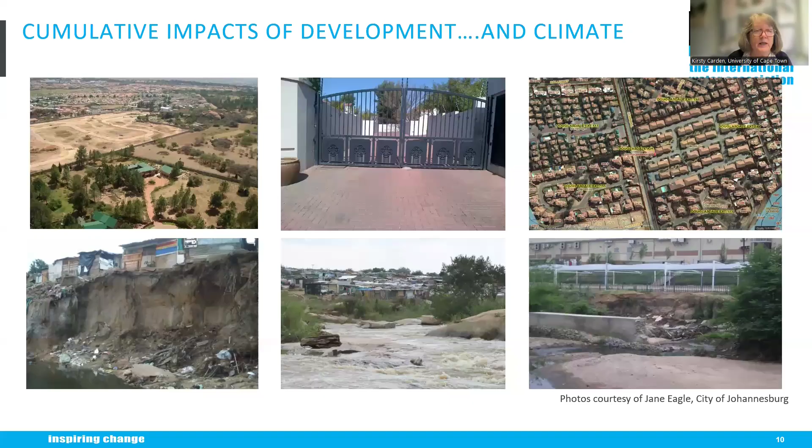I'm going to start off with a little bit of background to why we're doing this, certainly in our context here in South Africa, which is fairly similar to elsewhere in the world, particularly in the global south, where we consider the cumulative impacts of development and climate in what we are seeing in urban areas through the destruction of environments, through flood impacts, through putting in too many impermeable surfaces throughout cities, really encouraging increased runoff and increased pollution conditions.

So in South Africa particularly, we do observe the urban stream syndrome quite significantly because of our informal settlements and the numbers of people that live in informal settlements. So the flashier hydrograph that comes from this increased amount of rainfall falling on impermeable surfaces, of course, results in massive amounts of pollution in the environment.

And this is where what we have seen, the pursuit of the engineered solution to exploit water systems, so the piping of water into settlements without proper drainage and sanitation, comes at the expense of longer-term water security because of the impact of vast quantities of untreated wastewater that enter the environment.

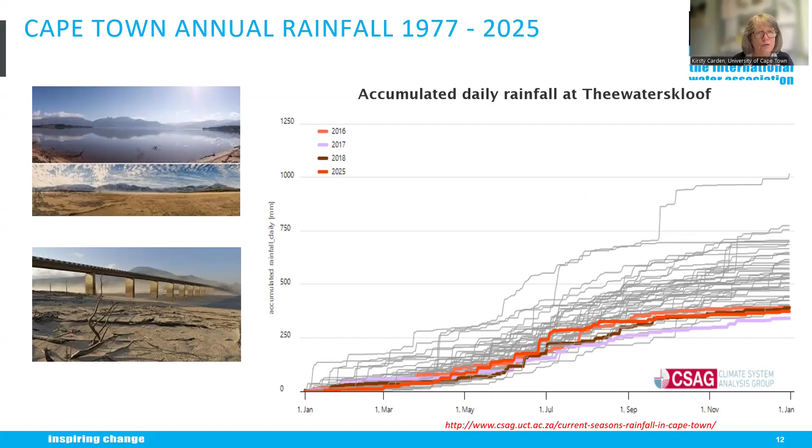So Cape Town's situation in particular, you've probably all heard of Day Zero. It was the time when we very nearly approached a point when taps would have had to be turned off. The accumulated daily rainfall at one of the main dams in our water supply system in Cape Town during 2016 to 2018 became extremely low. The dam reached levels of about 11.5%, making it very difficult to withdraw water. And so Day Zero was a possibility.

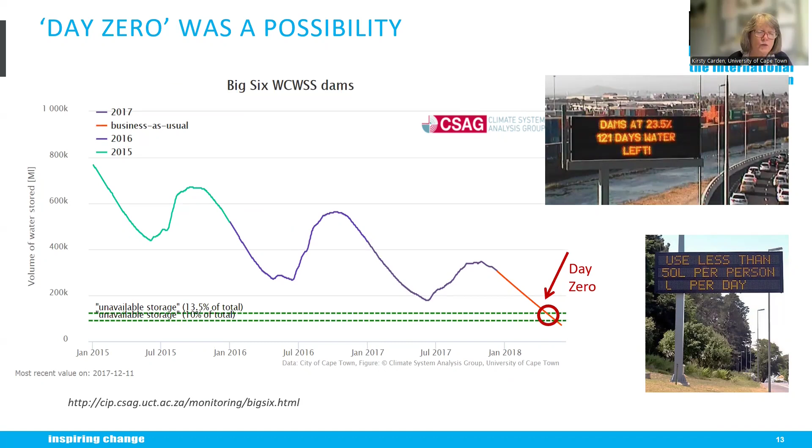The city was having to consider how to deal with this, how to create and provide water for its almost 5 million residents. They had to come up with plans, which largely included demand reduction and thinking about different ways to manage water in our city space. So what it did do, of course, was make us think about how we could future-proof a city like Cape Town, or other urban areas in the Western Cape.

And we took a lot of similar concepts from the Cooperative Research Center for Water Sensitive Cities ideas around water sensitive urban design, and we tried to put that into a framing and context for the South African situation.

Of course, what it largely meant was utilizing that concept of water sensitive design, but into what was really needed as multifunctional infrastructure—this hybrid between centralized and decentralized that could not only meet basic needs, very important in a country like South Africa, but also enhance aspirational needs through blue-green infrastructure, through building human capabilities and well-being, considering things like livelihood creation and managing diverse water resources.

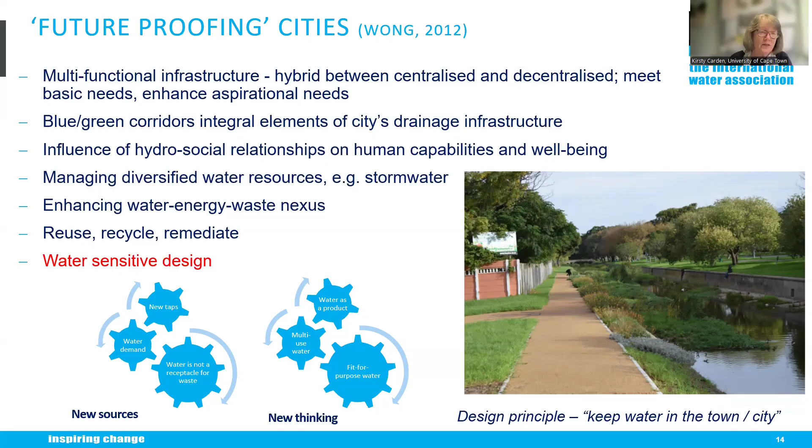So not only depending on a surface water system that we had for the city of Cape Town, but thinking about making use of, for example, stormwater and treated wastewater and other sources of water that we could build into our resource mix.

So as a brief definition, and I'm quite sure most of you know this, water sensitive design is seen as the process, and it encompasses all aspects of integrated urban water cycle management. So this idea that we need to think about water supplies, sewerage, stormwater management, even things like solid waste management, in one holistic view, so that we can actually build it into urban design and planning of cities and towns at all scales. So it's not necessarily a set of solutions and measures, but rather a process and philosophy to optimize both water management and urban design objectives.

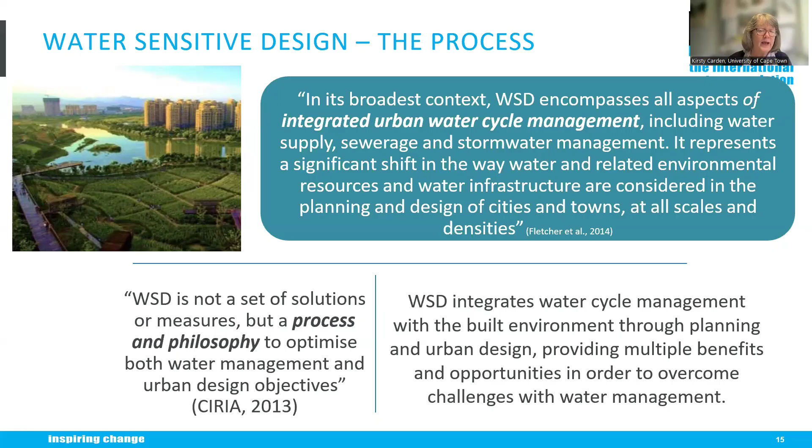It provides multiple benefits and opportunities, particularly in respect of building resilience. If water sensitive design is the process, water sensitive cities would be your destination. These are cities that are sustainable, resilient, productive, and livable through this combination of physical infrastructure, governance arrangements, and social engagement. They're generally green, blue-green cities with nature-based solutions for water treatment, green buildings and roofs, waterway naturalization, flood resilience, and groundwater management through managed aquifer recharge. So there is this intentional water sensitivity built into the design of a city.

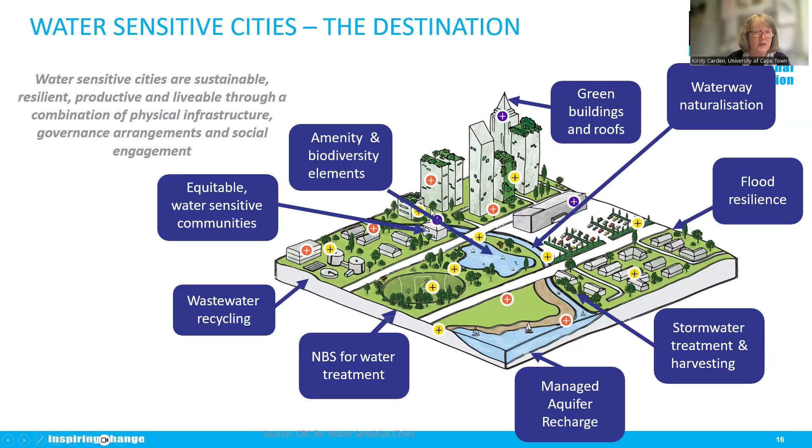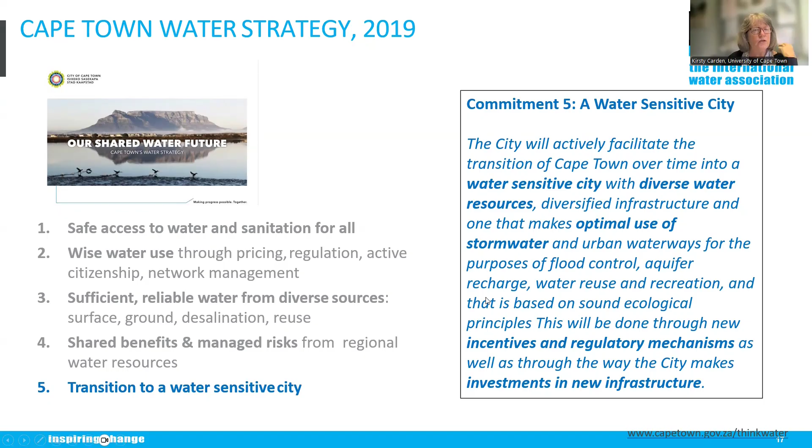What happened post the drought in Cape Town is that they developed a new water strategy in 2019, where they put together five commitments. The first are around the provision of basic services in a city with a large number of people living in informal settlements. But the fifth commitment is the transition to a water-sensitive city by 2040. The city has committed to facilitating that transition over time, to build in diverse water resources, make optimal use of stormwater, and consider the urban waterways for flood control, aquifer recharge, water reuse, and recreation. They're doing this through an implementation plan that includes incentives, regulatory mechanisms, and investments in new infrastructure. But in order to do this, there needs to be an enabling environment.

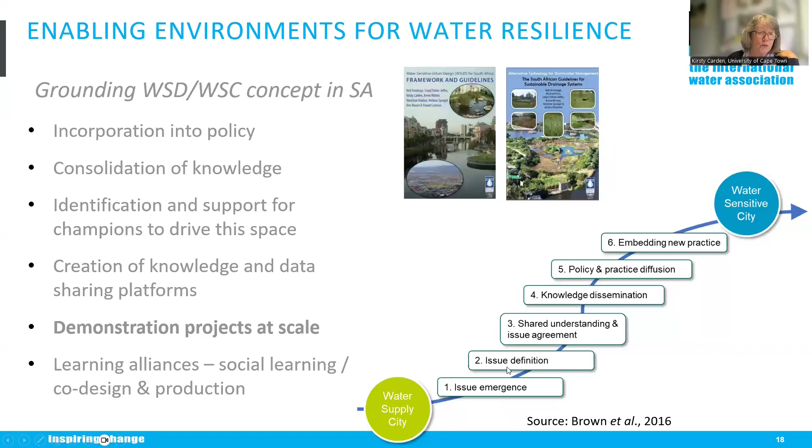So how do we ground this water-sensitive design or water-sensitive city concept in a country like South Africa? We have to start by incorporating it into policy, consolidating the knowledge we have, and creating knowledge and data sharing platforms that help us identify and support champions, and build learning alliances so we have co-design and social learning around this relatively new paradigm. But we also need demonstration projects at scale, to show particularly to politicians and decision makers why they should be investing in blue-green infrastructure, nature-based solutions, or water-sensitive design, which all essentially mean the same thing.

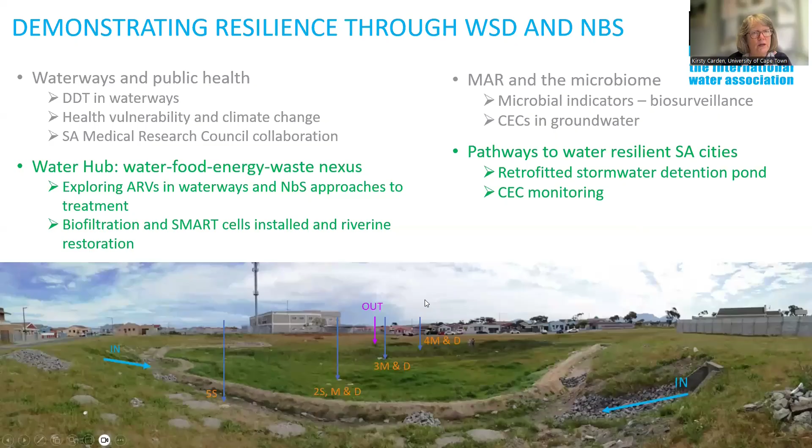To demonstrate that, I'm going to share a couple of examples from our Future Water Research Institute at the University of Cape Town, where we have what we call living laboratories. These are spaces where we can do more than lab scale research, looking at how things work in the real world. Some of these we've looked at are around waterways and public health. We also have research projects focused on managed aquifer recharge and groundwater management, particularly contaminants of emerging concern. And then we have two other projects: one at a demonstration site called the Water Hub, and the other a stormwater site in Mitchell's Plain, a suburb within Cape Town, where I'll explain what we've done through the living labs.

So the PAWS project stands for Pathways to Water Resilient South African Cities. We've all got clever acronyms for our research projects. This project was born out of the Cape Town Day Zero crisis, where we wanted to consider whether we could use the existing stormwater infrastructure, of which there's a significant amount in Cape Town. We have upwards of 850 stormwater detention ponds as part of our flood alleviation infrastructure. We wanted to know whether we could retrofit stormwater ponds to link stormwater runoff to water supply, and also enhance the environment around the pond with water-sensitive design elements and landscape-based solutions, building the multifunctional benefits that come from water-sensitive design and nature-based solutions.

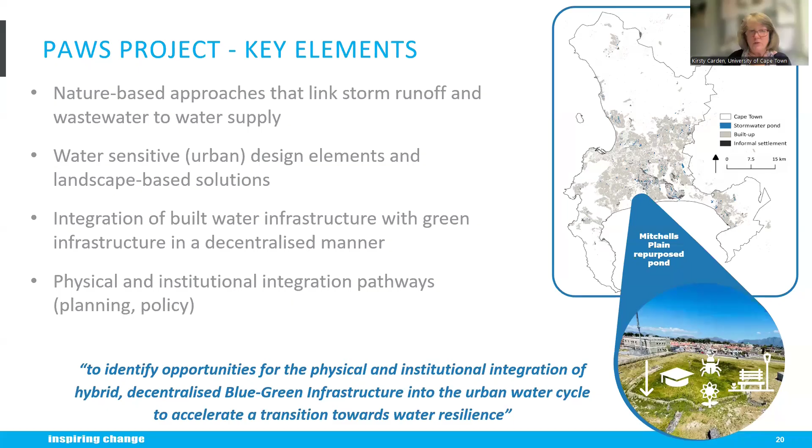So what we did with this - we selected a stormwater pond in Mitchell's Plain. There you can see a school in the background. We specifically selected a pond that had an anchor close to it that we could align our activities with, and we also did quite a lot of education activities together with the school.

This particular stormwater pond has two inlets and one outlet. Before the retrofitting took place, the stormwater largely short-circuited straight through the pond into the stormwater system, so there was very seldom any ponding of water in the system. But even so, this pond was designed to not keep water in it. It is a detention pond, not a retention pond, so it only holds water for a very short period of time, in the midst of a heavy storm.

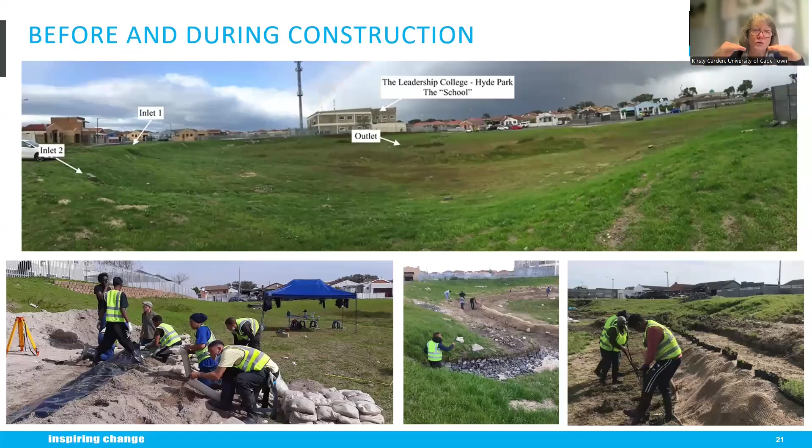So what we decided to do, in collaboration with local residents who did the co-design and co-construction with us, was build an infiltration swale in front of the two inlets to the pond, which acted as a means to hold back water coming into the pond and allow it to infiltrate slowly into the groundwater system. After construction, we also cleared out the inlets and added rock check dams as litter traps in the infiltration swale itself.

You can see here how the water comes into the pond. It's held in this forebay area, so some sediment drops out at that point along with litter capture. It then stays in the infiltration swale with two weirs on either end to allow overflow if it reaches a certain height, and then slowly infiltrates into the groundwater underneath the pond.

What we found after this key first phase is that retrofitting worked quite well, increasing infiltration by about 15% even without abstraction. Future scenarios with groundwater abstraction through managed aquifer recharge and recovery could result in stormwater harvesting and increased infiltration of about 110%.

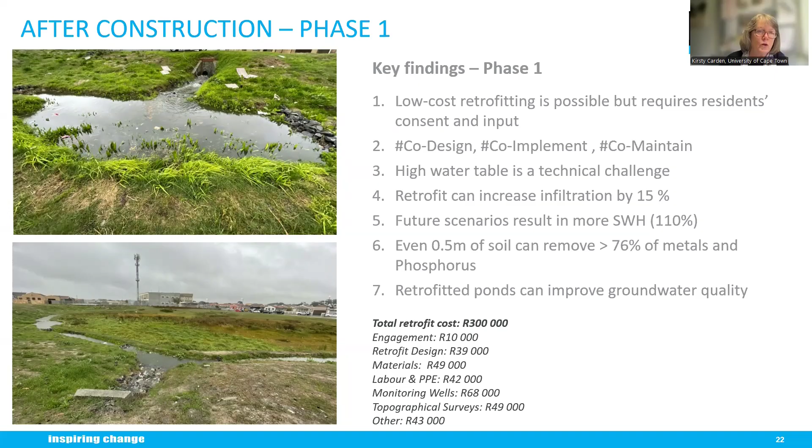Importantly, we also found that the stormwater was being treated. The retrofitted ponds significantly improved groundwater quality because of this. The stormwater coming into the site was relatively polluted, not bad—this was a formal informal settlement, so it wasn't sewage or anything like that—but it certainly did improve groundwater quality having a nature-based solution in place.

But of course it was more than that, in terms of how do we keep stewarding a system like this, and how do we bring people into multifunctional infrastructure space so it becomes an important aspect of a community and actually functions in a way that really brings those multiple benefits.

In an area like Mitchell's Plain, safety, security, and preventing land invasions become important. So beautifying this space, turning it into community infrastructure that can be used, is really important—raising awareness, adding support for amenity and biodiversity benefits, and making sure local residents could get involved.

This meant involving residents in the co-design, management, and ongoing stewardship of this space, and bringing in education programs and potential for job opportunities or job creation through things like seed harvesting, plant nursery development, sandbag building, and all sorts of other things that were part of showing why this is an important space.

Importantly, what also happened out of this particular project is that we built a Water Resilient Cities community of practice, so we could have an ongoing conversation about why this sort of co-production around these case sites, these living laboratories, is so important—with many different civil and city stakeholders of multiple disciplines and professions, providing them a platform to foster network building and social learning necessary for this type of living lab.

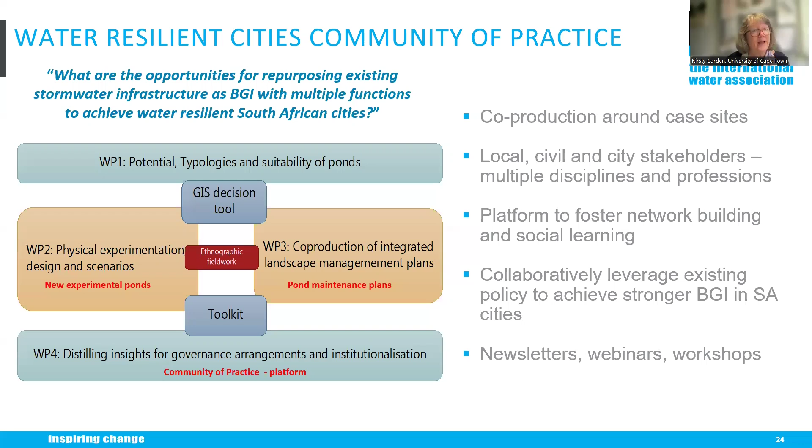And that's ongoing, even though this project came to an end at the end of last year.

Very quickly, I also wanted to share an off-campus urban living lab we have just outside Cape Town, about 60 or 70 kilometers east, outside a little town called Franschhoek, where we were given the opportunity to retrofit a decommissioned small wastewater treatment works that historically served the town but was decommissioned when they built a new wastewater treatment works. It's located downstream of an informal settlement.

You can see in this picture, on the slopes of the mountain, an informal settlement called Langrug. About 8,000 people live there in various types of informal dwellings with very poor service provision, particularly around sanitation. A small river runs past Langrug through this agricultural area and past the water hub, our demonstration site, where we experiment to see if we can use nature-based solutions to treat and clean up highly contaminated runoff from the informal settlement.

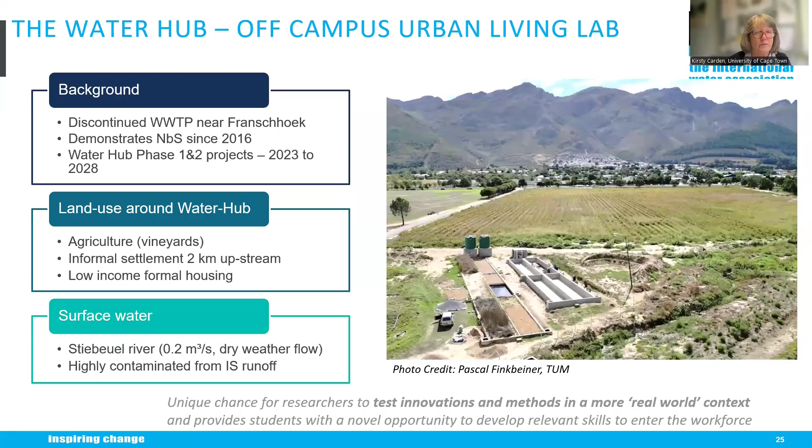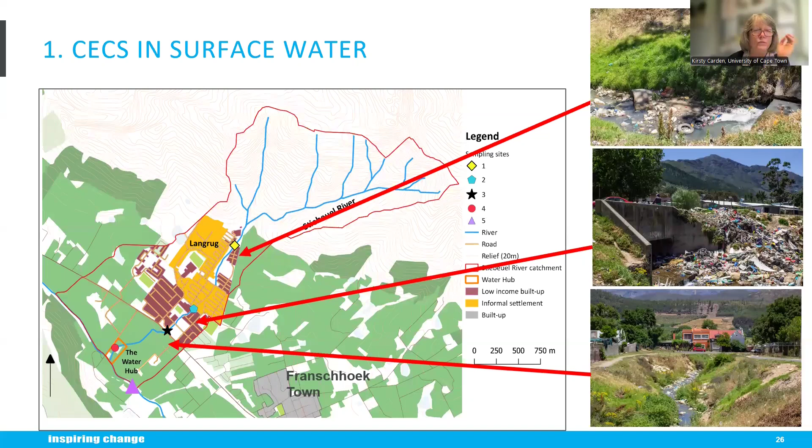This runoff comes into the river and joins the bigger Franschhoek River further downstream. Here you can see a map showing Langrug on the side of the mountain, the small catchment of what we call the Stiebeuel River that flows past Langrug, and the red dot at the bottom is the water hub. Some of the pictures show the state of the river—very, very badly polluted with sewage, solid waste, and generally highly contaminated runoff from the informal settlement, which runs all the way down past the water hub and through to the Franschhoek River.

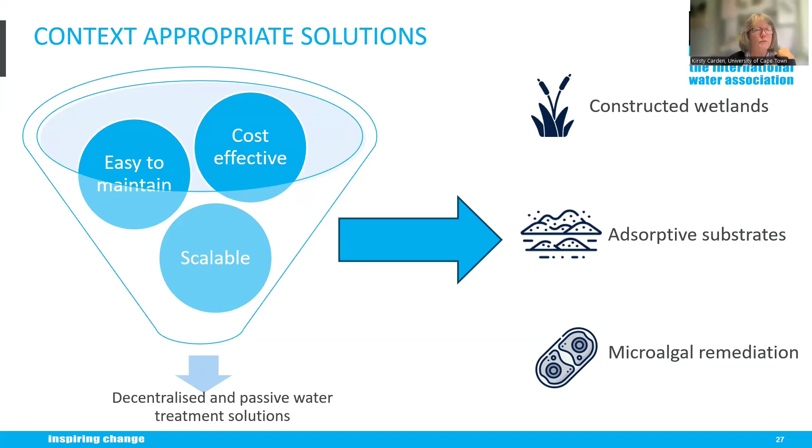So what we were hoping to do is to put in nature-based solutions that were context appropriate for this particular very low income environment: easy to maintain, cost effective and scalable, and could be used as a decentralized, passive, no electricity, no chemicals water treatment solution that we could potentially scale to other informal settlement contexts around the country. We did this through constructed wetlands or biofiltration cells, using adsorptive substrates, microalgal remediation and other forms of nature-based solutions.

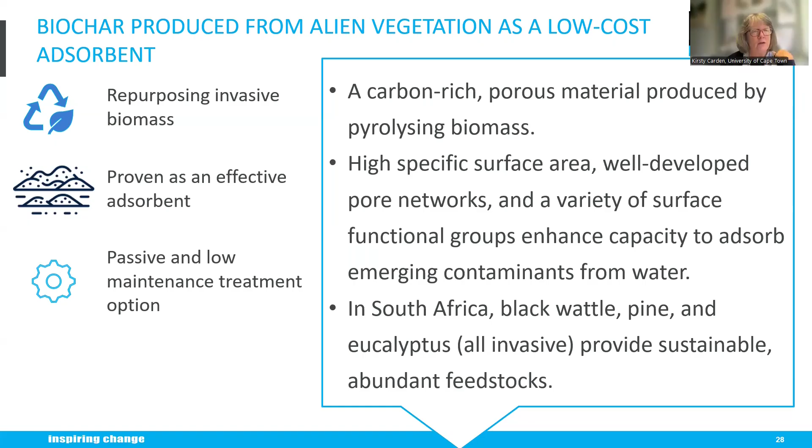In one of the experiments, we use biochar produced from alien vegetation as a low-cost adsorbent. This has multiple benefits in that we're repurposing invasive biomass into something useful. It's been shown to be an effective adsorbent and provides a passive, low-maintenance treatment option. It also gives job opportunities in a poorly economically resourced environment, and removal of alien vegetation contributes to more runoff into our dam system, our surface water storage system in the Western Cape. So there are really multiple benefits from this.

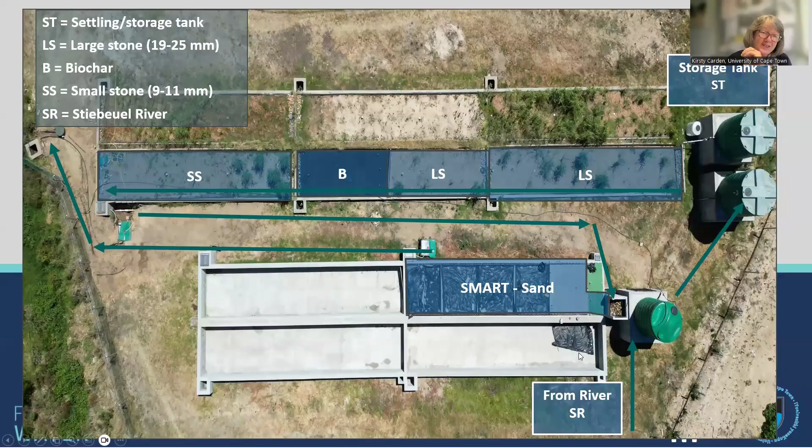The system for this project is 2 sets of adapted sludge drying beds that have been turned into constructed wetlands. They have different types of media, from large stone to biochar to small stone. River water is diverted into a storage tank, runs through this constructed wetland treatment train. Some blocks are planted with plants, not all of them, and there are control blocks as well. That water then gets pumped into a sequential managed aquifer recharge sand filter system, and from there it goes to various project follow-on steps, which I'll share with you now.

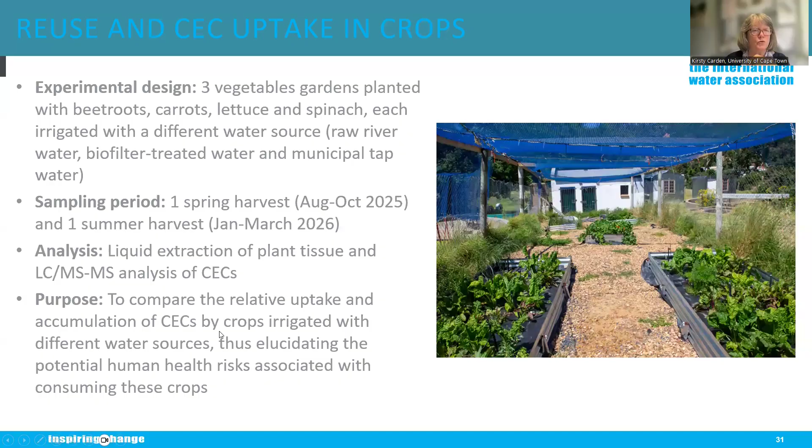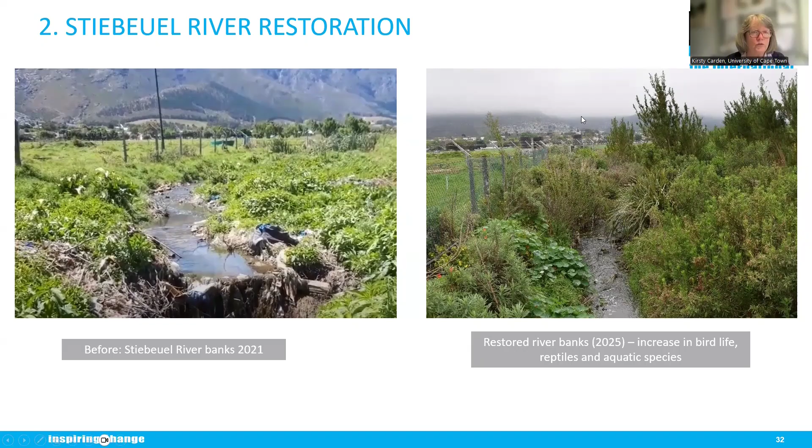Another project at this living lab at the Water Hub is restoration of the river system to put back the biodiversity that is supposed to be there. On the left you can see before, in 2021, the Stiebeuel River was poorly overrun with alien vegetation. It has now been restored with indigenous vegetation, which also contributes to increased water quality through the river system as a whole.

Livelihood opportunities at the Water Hub are being further developed as various projects carry on there. One is around irrigation of vegetables and soil with this treated and untreated water, so we can study the mobility of these emerging contaminants. There are link-ups with local farmers, restaurants, and guest houses to be able to use these vegetables and food products in safe food environments, and also growing cut flowers. If the water is not of significantly good enough quality, there are other sustainable livelihood opportunities that can happen at the Water Hub.

Ongoing projects: we are expanding the water treatment facilities at the Water Hub, and also looking at various employment opportunities in agriculture and biogas generation. A biogas reactor is being installed at the Water Hub, with potential to bring in organic waste from the town and from the Water Hub itself, from restaurants and breweries nearby, so we can start powering various facilities there, showing a circular and linked system around the food, energy, water nexus.

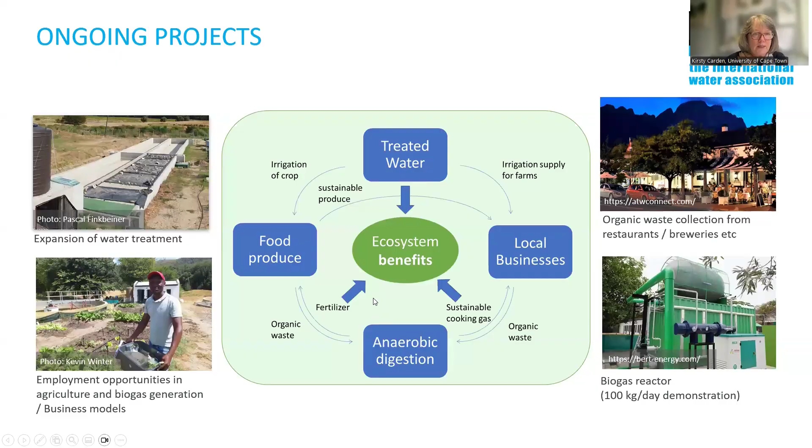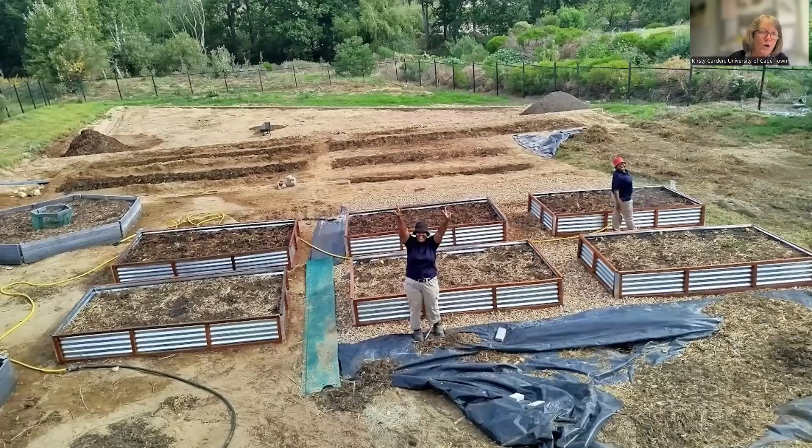This is a recent project where we have expanded the agriculture project. It's a local social enterprise with people from the nearby informal settlement. We're in the process of building raised food growing beds that we will irrigate with this expanded treatment train, and these vegetables will now be supplied in bulk to the town.

Lastly, another social enterprise activity linked to what we're doing at the Water Hub is a series of e-bikes. These delivery bikes will be used both to collect organic waste to bring back into the biodigester, and to deliver vegetables from the social enterprise growing on site. This is my very last slide, where we're also trying to put together, almost complete, what's known as a green precinct at the University of Cape Town.

This is seen as an important initiative to bring students into what we are trying to do at the university as a whole. We have sustainable water supply options that will be showcased here.

There is a decentralized wastewater treatment facility, a membrane bioreactor, that takes sewage from two of the student residences. It gets treated on site, put through a constructed wetland system and a number of sustainable drainage options to improve its quality, then used for toilet flushing and irrigation at another residence next to the site.

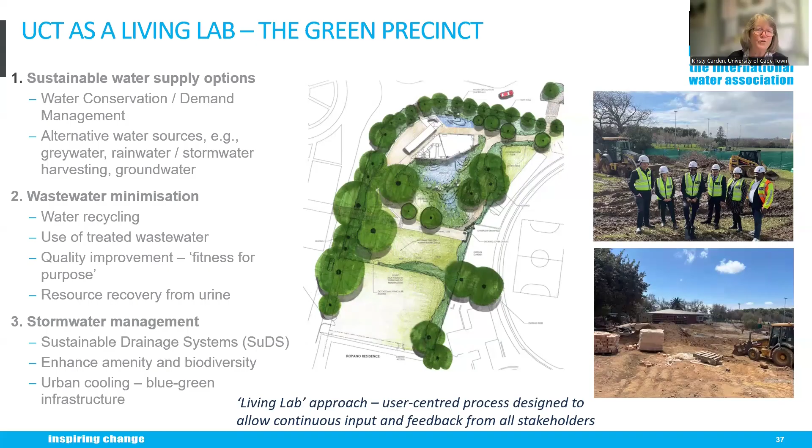Future Water will be hosting and leading this process going forward. And I think that is me.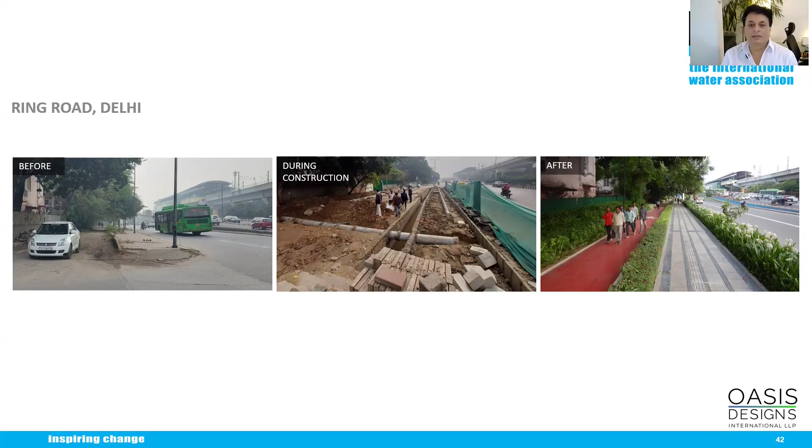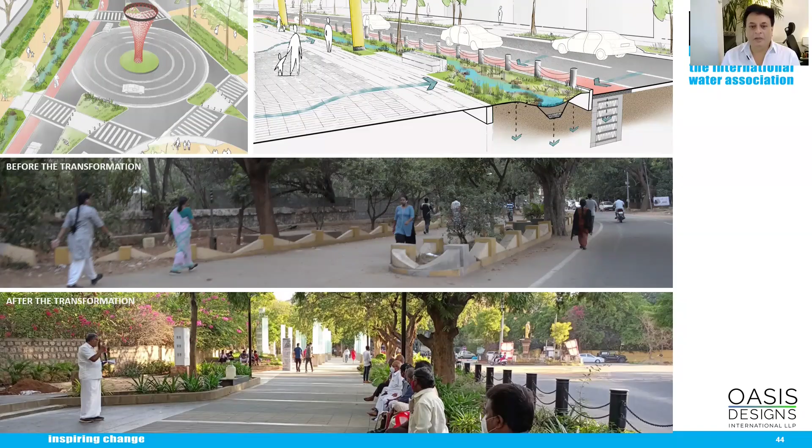But this is what the final product looks like when all the water from the road is actually getting into that swale and is being allowed to percolate into the ground. So while you're fixing a street, you could very easily build in these kind of facilities to ensure that overall sustainability for the city remains, increasing the resilience factor by programming your open space. Similarly, we have done many projects around streets across India.

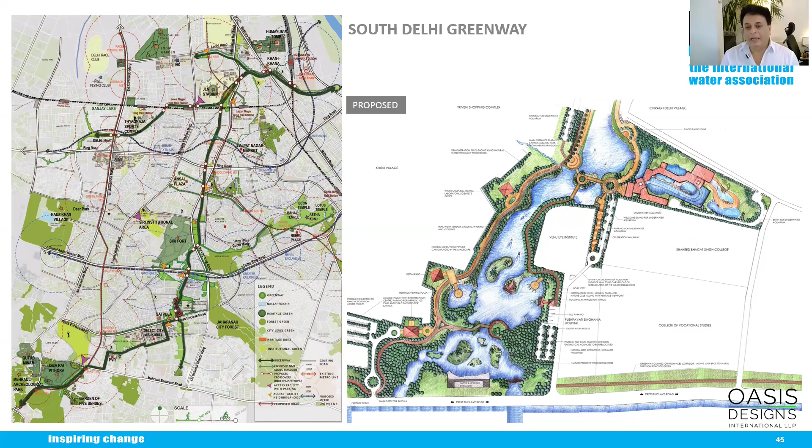One very interesting project that we worked upon, which brought more understanding about water, was this natural drain corridor in Delhi, about 12.5 kilometers, flowing from the ridge to the river, but unfortunately had started collecting a lot of sewage on the way. So we looked at how we could clean up the whole system and reconfigure it as a greenway for cycling and walking and connections to history, becoming a truly public spine for the city.

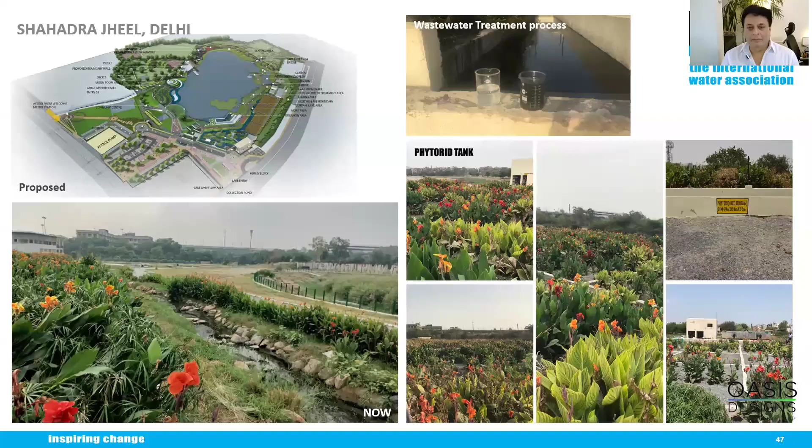So these are some visualizations of what is there and what we were hoping to make those into. We got a chance to really work around wastewater treatment when we had to revive a particular lake in Delhi where there was no source of water. All the catchment areas were built up, and there was only sewage flowing next to the lake, which we thought if we could bring that in, treat it with phytoremediation.

And here we work with the organization called NEERI, and we managed to make all the flower beds that you see actually part of the phytorid treatment. So the water under this flower bed is getting treated, and you can see the result of that and how we filled up the lake with treated wastewater.

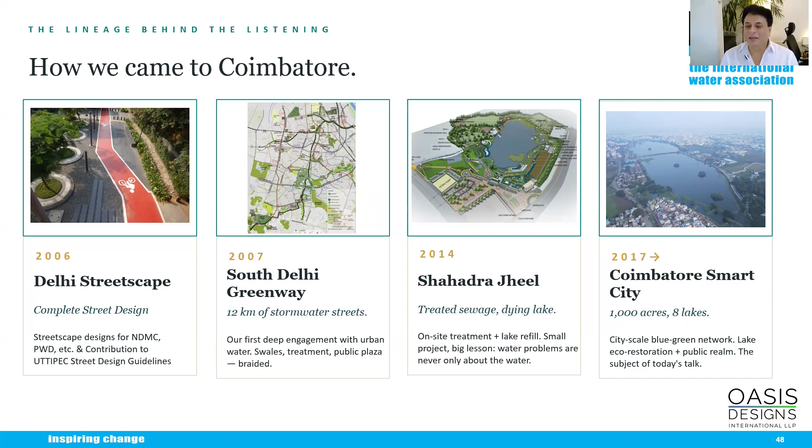So the journey from how we manage stormwater on streets, what a city level system of drainage channel being repurposed, filling up a lake with treated wastewater - it kind of prepared us in a way to look at this project, which I'm going to do a deep dive on now for the Coimbatore Smart City.

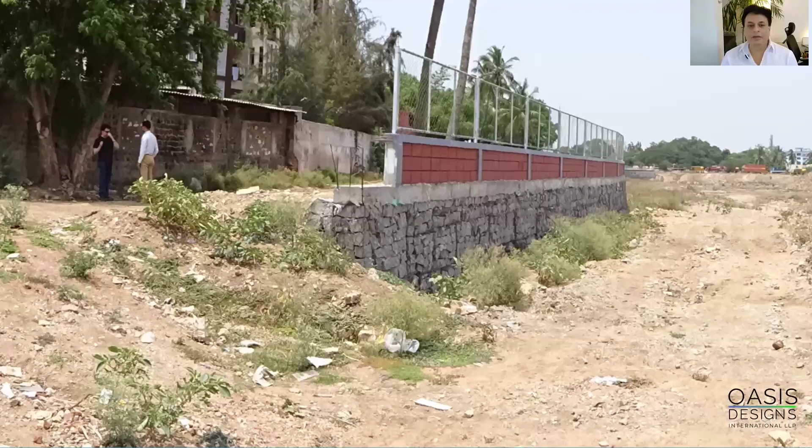Right from the beginning, before we bid for the job, we first made up a consortium of people we could learn from in terms of water. Like I told you, we are architects, designers, and urban designers, landscape architects, but we do not have the detailed understanding of sizing up different components of wastewater treatment, for instance. Similarly, we brought in a hydrology expert to look at the overall situation, catchment areas and all, and we worked with a local architect. So while pitching for the project, we kind of had a very strong team when we went in.

And the local architect, you can see us there. I was on the first site visit. I was asking him, where is the lake? And the whole place looked like that. So he said, we are standing in the lake. So, I mean, for me to imagine that this whole piece of land was actually a lake, it took some level of imagination.

Then looking at the city, we realized that the whole city has come up around the river Noyal Valley. And you have the hills in a horseshoe pattern where all the water that comes down from the hills to the river was being actually held back. This was a historic system designed by the Chola dynasty, maybe 1,000 years back, where all the water that comes in from the hillside was collected. Each stream that you can see was collected in a lake. And then you also had anicuts on the river, which would become an extra source of water to a particular lake.

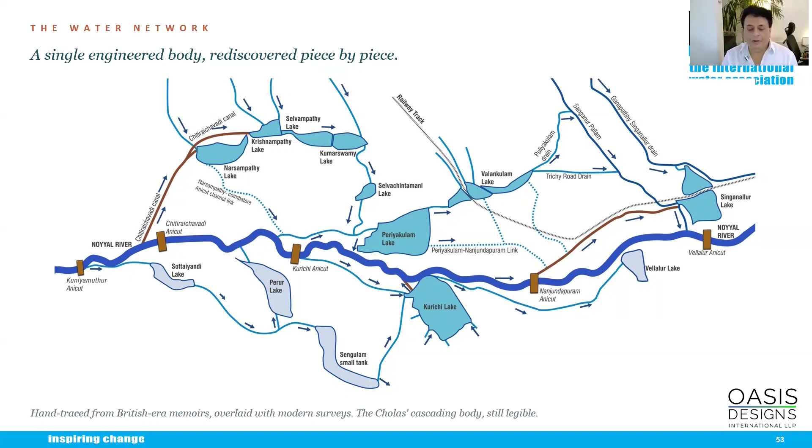So one is it's getting fed directly from the streams coming down from the hills. And the other one is that we have a connection from the river. And the third one is that it overflows into the next lake. So every lake downstream is being fed by the lake upstream. Once it fills up, all of that water finally finds its way back into the river. So instead of just allowing the water to flow away, these people had designed a system to hold on to the water historically for irrigation and for agriculture and those kind of uses.

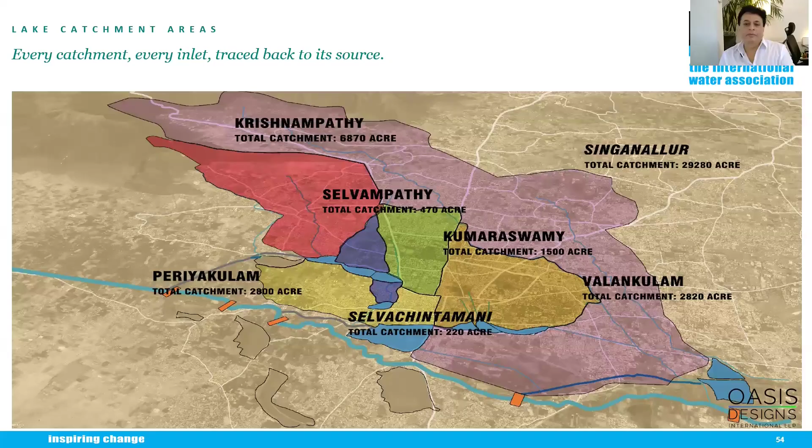So when we came in, we had to do a full catchment area analysis of each lake - how many acres of land is actually draining into that particular lake through that channel. Unfortunately, over time there were some encroachments and slum settlements which started happening around these water channels and around the lakes, because it was not regulated. But slowly the waste of these unsewaged connections coming into the lake would create a situation where the lake started becoming polluted, and very soon it became like the backyard of the city.

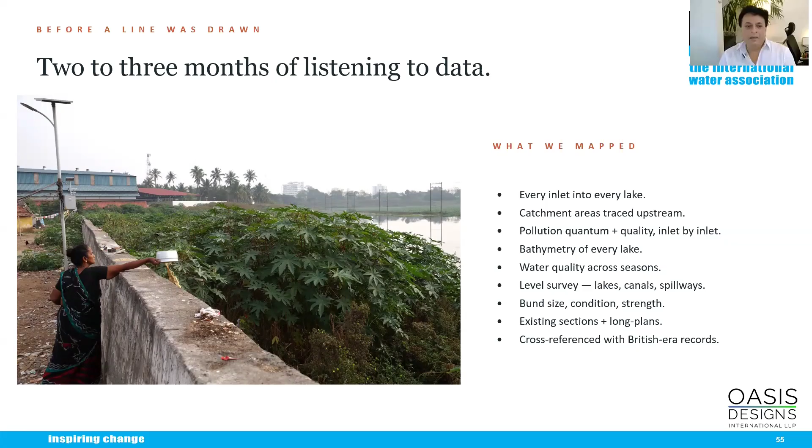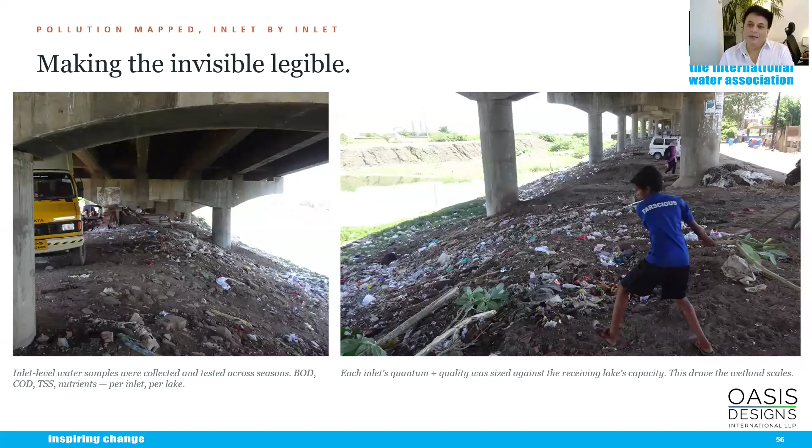So we had many problems regarding - there were these beautiful spots in the city. I'm saying beautiful because I could see like if we can transform these into something nice. But my team was like very unhappy because they had to walk through all these dirty areas. This is a shaded kind of area under a particular bridge, and then you have the lake on one side.

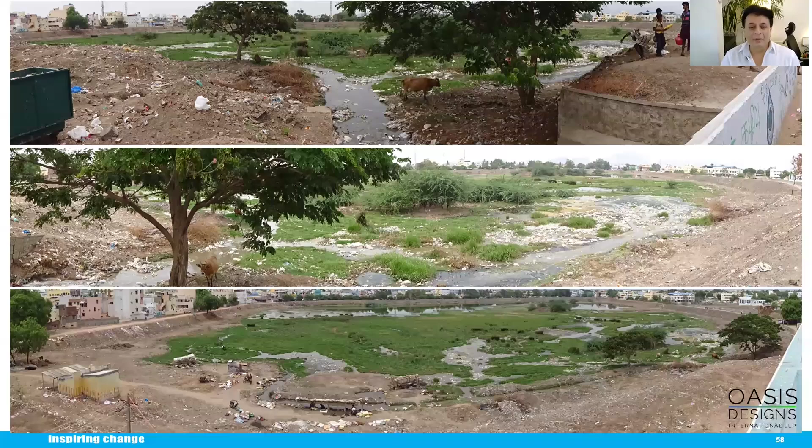The encroachments and the settlements there would tend to directly put all the waste into the lake. So we had a tough time when we went there in the initial phases to look at all of this. For instance, this particular lake you can see here is completely dry. It got into eutrophication, and we also had to do soil remediation in terms of excavating.

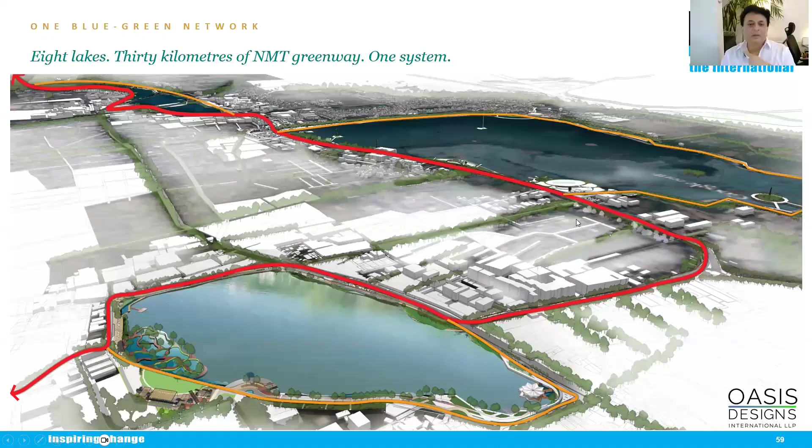Anyway, the brief given to us was that we have these 8 lakes, and if we can fix them, and then also set up a cycling corridor to connect all of these. So the problems - we started restoring the canals and the overflow gates. We had to look at sewage, how do we want to treat that. We had to work with water treatment systems, so wetlands, and major surveys about bathymetry and whatever.

While talking to the local people, we realized that this city did not have too much open space for the kids. I remember talking to a few kids, and they said there's only one ground and we have to book in advance to play football. I was like, wow. That was the time we thought, if we are doing this lake project, if we are trying to open up the system, we'll definitely want to give some space for them to come out and play. Similarly, the city was supposedly the cultural capital of Tamil Nadu, one of the states in south of India, where again the lake system's potential of using that as a public open space was not something the city had yet discovered.

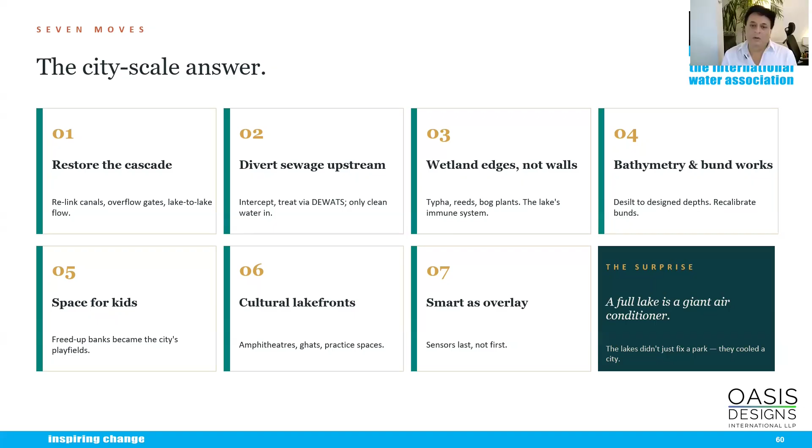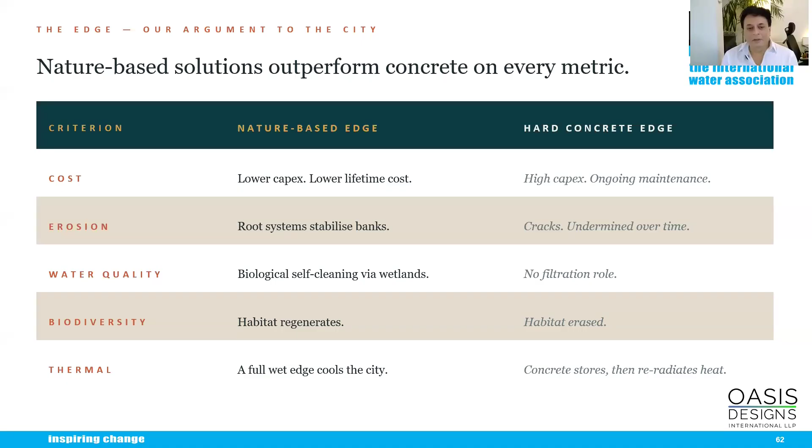Of course, because it was a smart city, we had an overlay layer of the smart component. I remember once a reporter asked me, 'What's the smart thing you're doing for Coimbatore?' I said, 'We were not into sensors and all the technology components. We just wanted to fix the system.' So we wanted to go back to the basics, like how water should flow, how we should avoid erosion and pollution coming in, how we can regenerate biodiversity, and how we can create a level of thermal comfort for the city. So these were our agenda points.

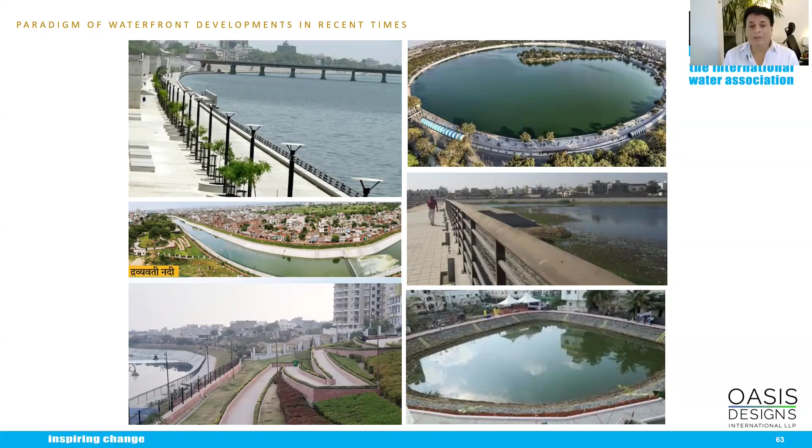The challenge also was to explain to the client that the conventional way people typically deal with water bodies in India always had these hard edges, in all the examples we could list out. This was something we really wanted to avoid. We wanted to experiment and do a nature-based solution, like blue-green infrastructure, to come in.

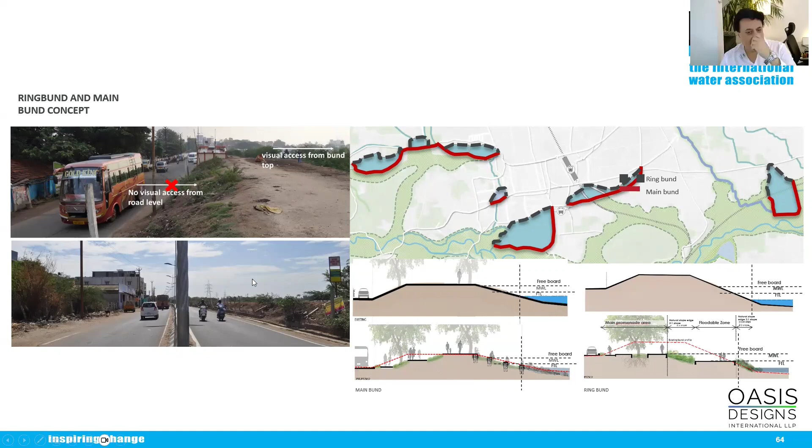To do that, we had to study the hydrology, which I showed you earlier. From that hydrology, we got to know that there were some bunds which had to hold water because this was a gravity-based system. So those would be the main bunds, and the remaining would be what we call ring bunds, which could be lower. Now, analysis of some of the bunds which were blocking the view of the lake from the city showed us that these are actually ring bunds which can be lowered.

To do that, we had to convince the city authorities that this bund had just come up because of some desilting drive. Some people desilted the lake and put all the desilted material on the edge, blocking the view of the lake from the city. So they had big doubts on whether we're going to breach the bund and flood the whole city.

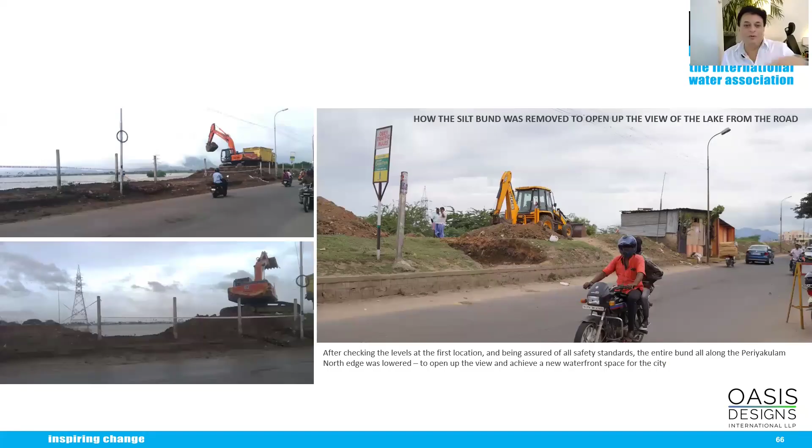So you can see this person here. Every time I look at this picture, I can't help but laugh. We had done all the calculations and then created that small breach just to show them that the levels are okay, and finally managed to get the whole bund removed from there. That's the team celebrating that one breach of the bund, just to show them that the lake waters are still way below the road levels and never going to come up and flood.

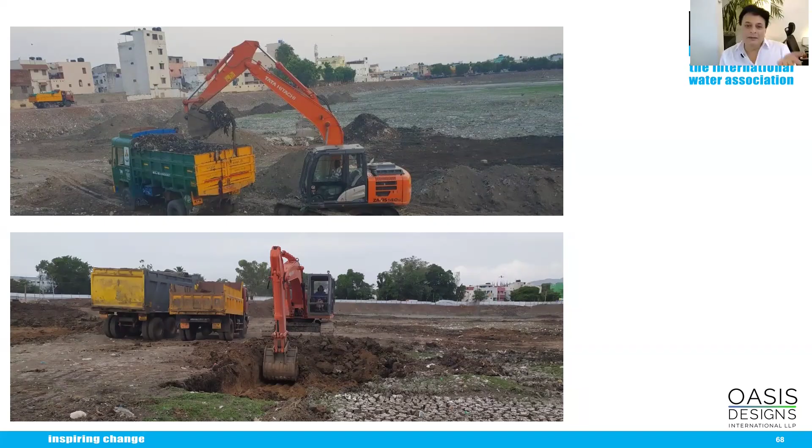Similarly, the other lake I was telling you about, we anticipated some bit of desilting, but here the desilting exercise seemed to be endless. We went on digging and found more plastic, went on digging more and more plastic. We were wondering how deep we were supposed to go to see uncontaminated soil. So the kind of challenges we had were of a different nature, as we were learning everything on site in a way, because it was the first project of its kind, with no precedent of nature-based solution.

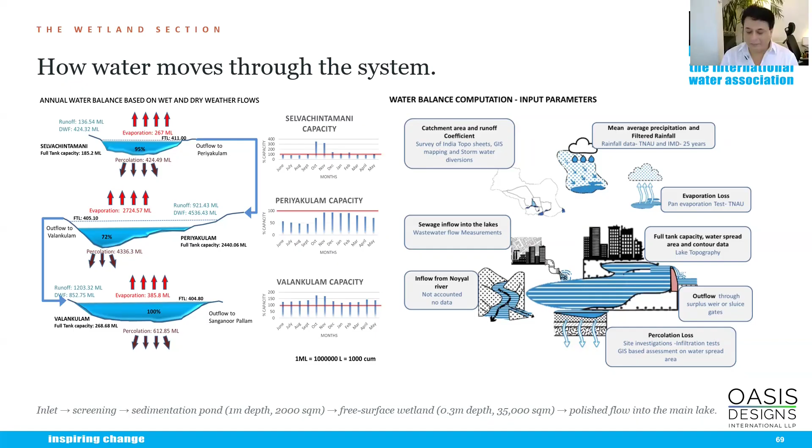Another aspiration the city had was that these lakes are meant to capture rainwater and should remain full. They should not dry up in the summer, which we thought was okay because when you get rains, it can fill up again, acting as a flood mitigation measure. But their aspiration was that we could somehow keep it full, or at least looking full with water. So we calculated the evaporation loss and percolation loss, and luckily because we had sewage coming in, we treated that, and could top up the loss with that water.

Now, when we remove that bund at the base level, the bund being narrow at the top and wider at the bottom.

Now, the contractual team there, they were used to making roads. So they told us, now we have done this leveling, and we have put the line out, and you just give us one section and we'll roll it. So I told them it's not one section, because we have so many things, and every meter, the way we have articulated this is much more complex.

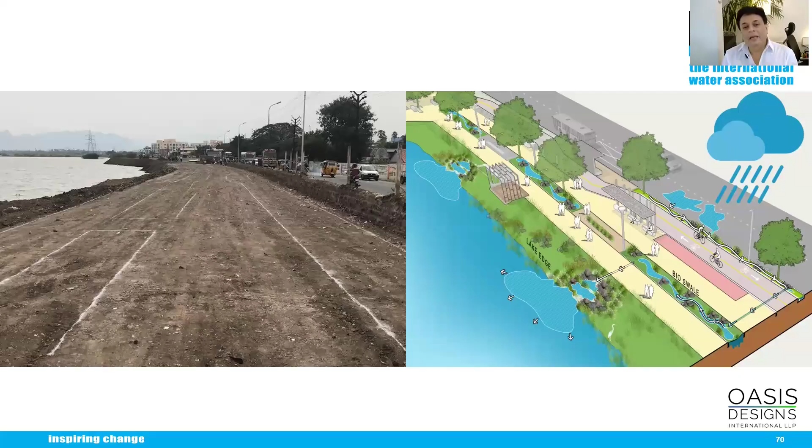So again, the challenge is to sit with them and actually explain what we meant, in terms of design intent, how the revetment would come in to prevent the erosion, how the slopes would get the geo grid happening with the native planting, what the edges, why we need to do all of this.

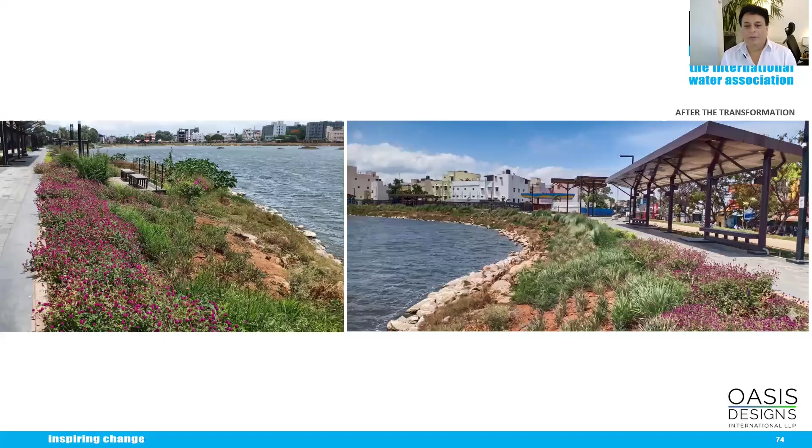And then, the horticulture guy would come and tell me that you are planting all native species, which here people don't value. You should put some flowers and roses. And I said, for maintenance and for inviting the biodiversity, we need only native grasses.

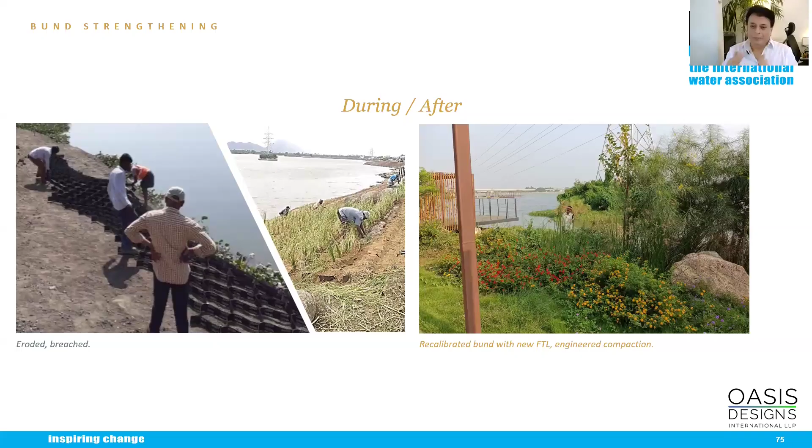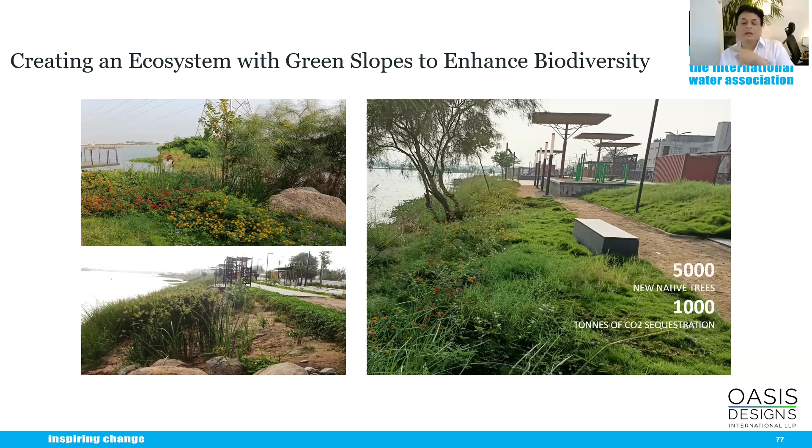So this is how the whole slope was laid out, and the planting palette was set, and all the native plant material was selected, palleted, and then we put in flowers and grasses and ground covers, and trees obviously. These are pictures from when we just finished. So what you can see is the flowers come in as pollinators, which would then help with the pollination of the fruit trees, which would then attract those birds coming in.

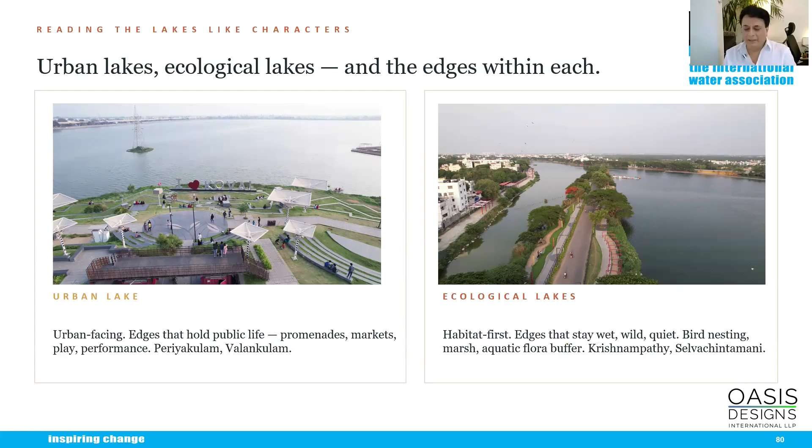So finally, we had a whole series of slopes which were ecological and urban. We categorized the lakes in a manner that we could also get in people to enjoy whatever we are creating. Like I told you, one of the design briefs was to connect all the lakes with a cycling kind of track, and how we had to respect the natural areas, clean them up, regenerate the biodiversity.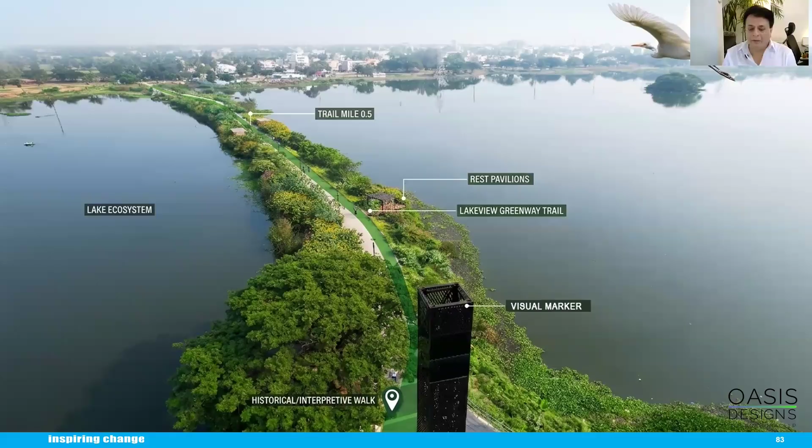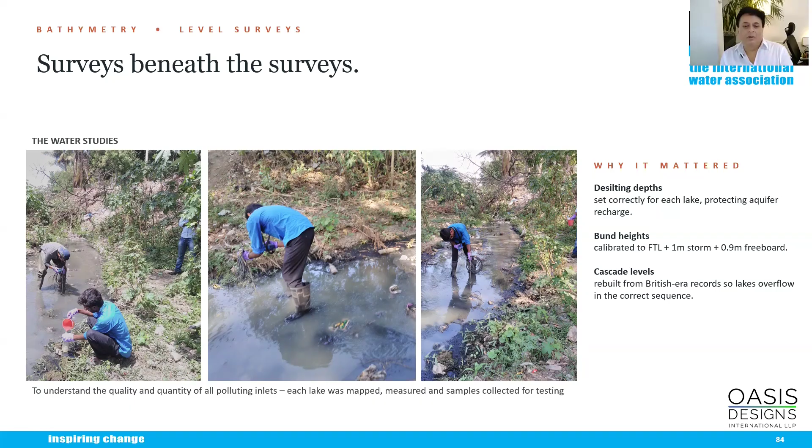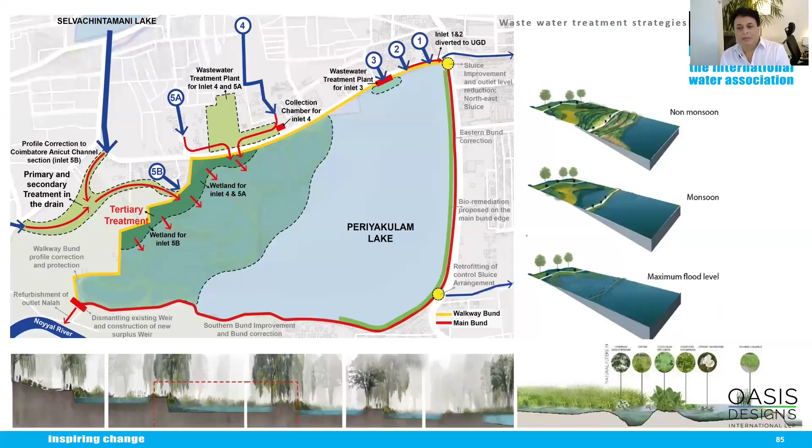So the whole job now - nobody realizes this - was our partner team from CDD, where every inlet was mapped, and the pollution load and the quantum, everything was tabulated. Then we came up with a strategy as to what should we do with what inlet. Can we combine some? Can we divert them? Then a whole series of wetlands at every inlet in every lake.

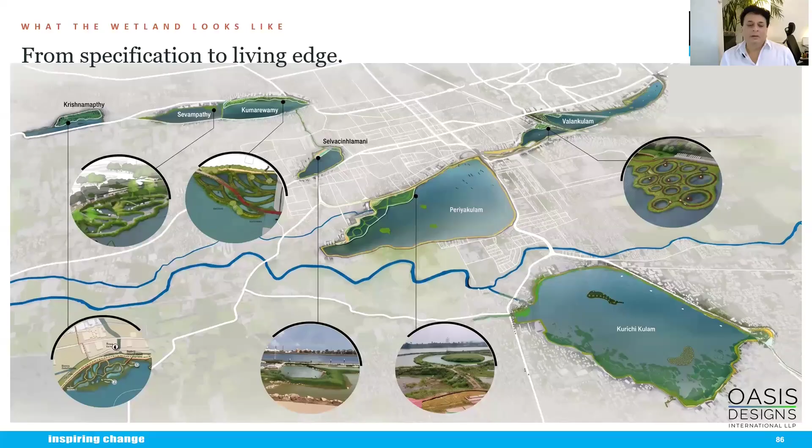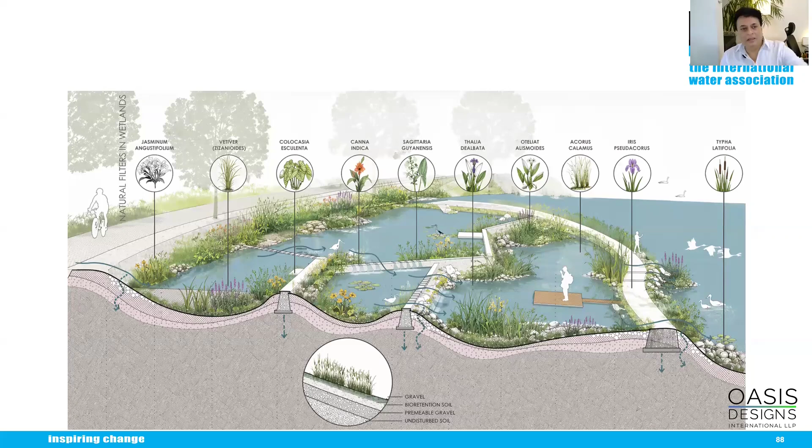My design team here, we thought, why should the wetlands look similar? Each wetland should be different. So finally, we got these wetlands put in as tertiary treatment to the sewage water treatment facility that we were building. We worked with natives again to figure out plants which would absorb the nutrients from the water, and also shape them in a way that you can see here the brown water actually becomes blue as it flows into the lake.

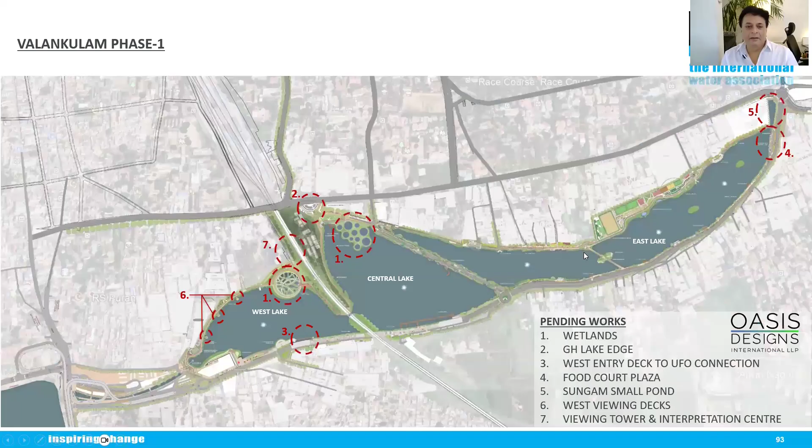And in the wetland we added these little places where people could actually go and understand how nature is helping the lake to keep its own water clean. So this is an aerial shot of the same lake where you can see the wetland and the perimeter of that, and many different lakes with different inlet conditions and different wetland designs coming in.

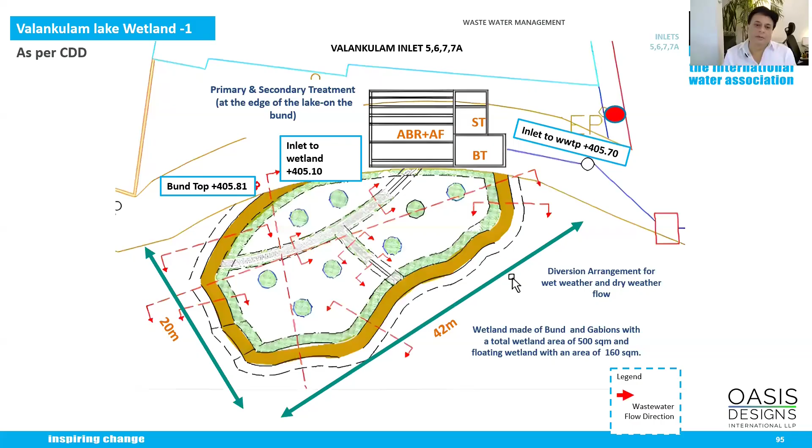Here I should acknowledge the fact that first we could not have done this without our partners. They would first size up the wetland, the chambers, the retention rate for every chamber, and then we would get a drawing like this, which we would then try to modulate into a landscape design working drawing, which would go to site. So learning every aspect of the job was a learning for us.

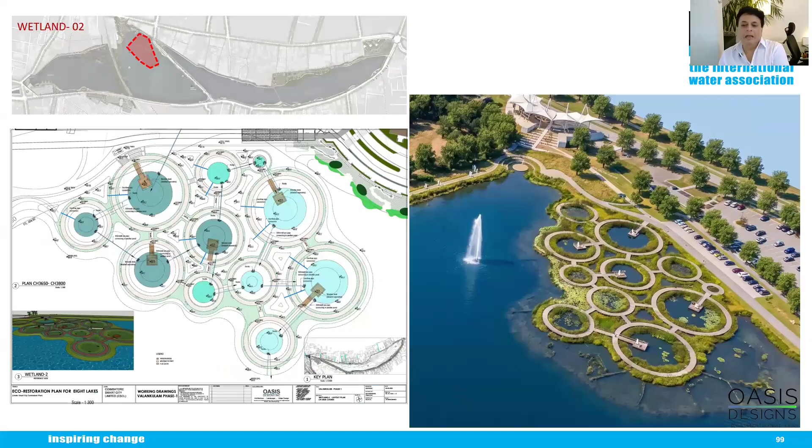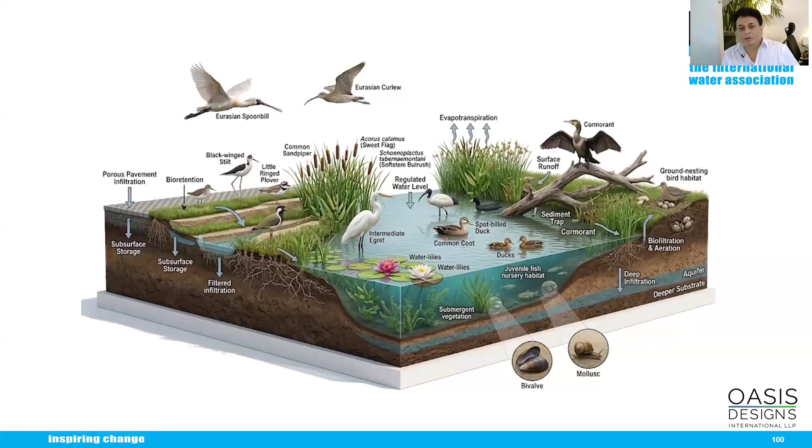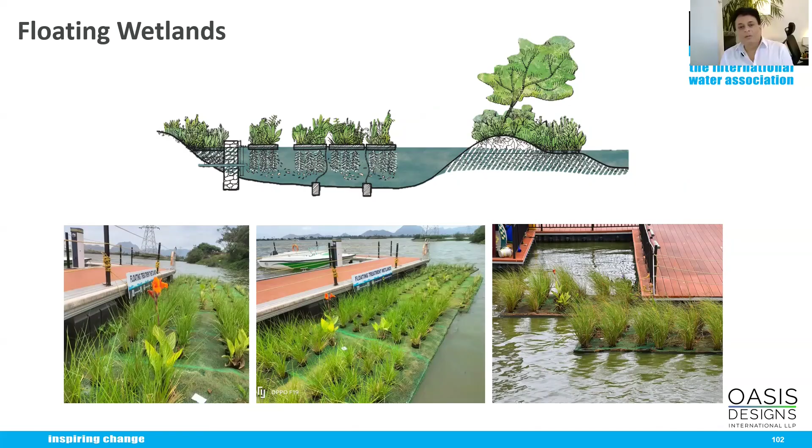We had a biodiversity expert on the team who told us about creating shallow shelves for birds who would like to nest there, and even juvenile fish finding spots to hide in the grasses with the stones, all the different species of birds and plants that we need - which plant will attract what - and then also putting in floating islands to ensure that the lake waters remain clean all the time.

Some of the areas that we managed to retrieve from the shifting of the slum encroachments, which was being done under the court orders, we also tried to put in lagoons and increase the water area.

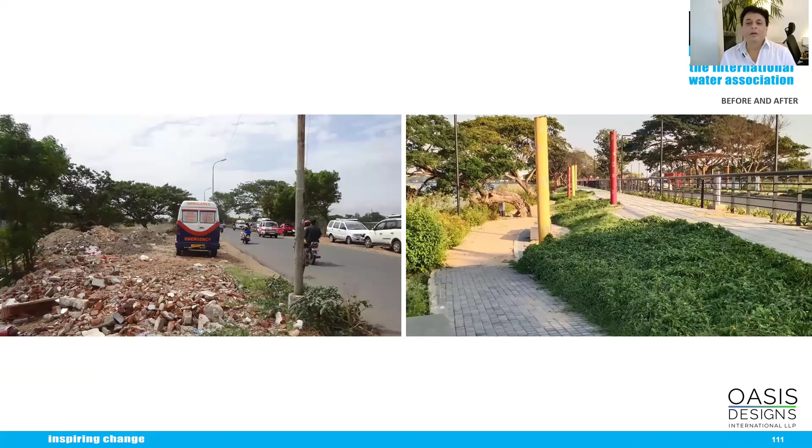This was from a recent visit. Then some other lakes which were bigger needed a more dramatic kind of expression to help people understand. What was earlier a disused, neglected, and unkempt place has now become the city's main must-visit point for all the tourists.

This was that place I showed you under the bridge, which opened up, and we lit up the whole thing. Now it's like the cultural hub of the city. Everybody is down there every evening. You won't believe how many people are visiting that place. Earlier, nobody would dare.

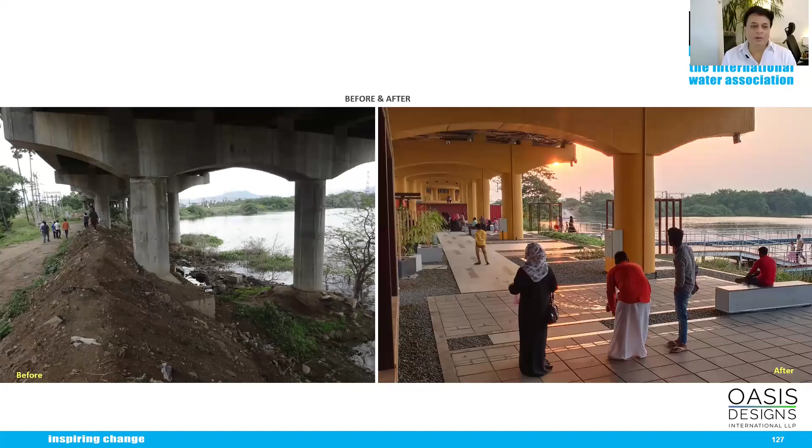That's my team - we were down there, and this is what it used to look like, and today, what it looks like now.

Akash, 5 minutes more. Yeah.

Now the whole city has kind of re-embraced the lakes, which were part of their history. They have a Lantern Festival, an annual New Year celebration, and many people have started preparing performance metrics - how people feel safer, how people are feeling happier, mental wellness, and even the businesses and land prices.

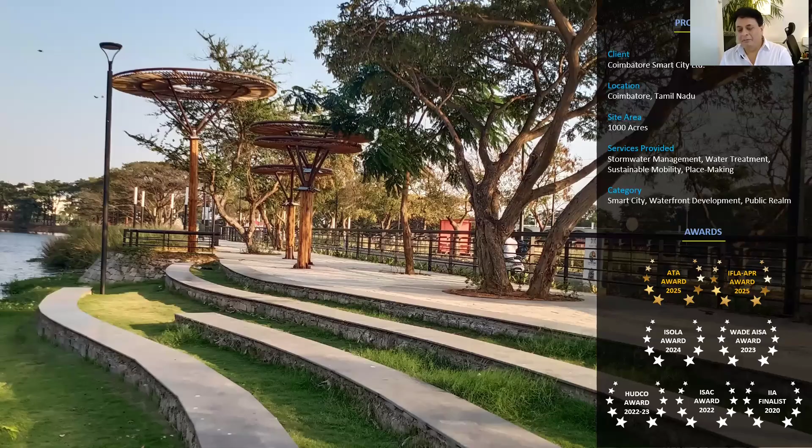We've been winning many awards for this project, including national and international awards. We got the IFLA APR award as well as the UN Habitat ATA award very recently - we were in Hong Kong to receive that. And that's the team, all of us who contributed.

Thank you so much. So basically, we just listened to what the lakes had to say, and that's how we restored them back for the city. Thank you.

Thank you, Akash. Very interesting presentation, and in particular this one, because having worked in India to raise awareness of linking water, city, and planning, it's great to see at this scale how the smart cities project was integrating nature. Excellent, good example. The floor is now open for questions and answers.